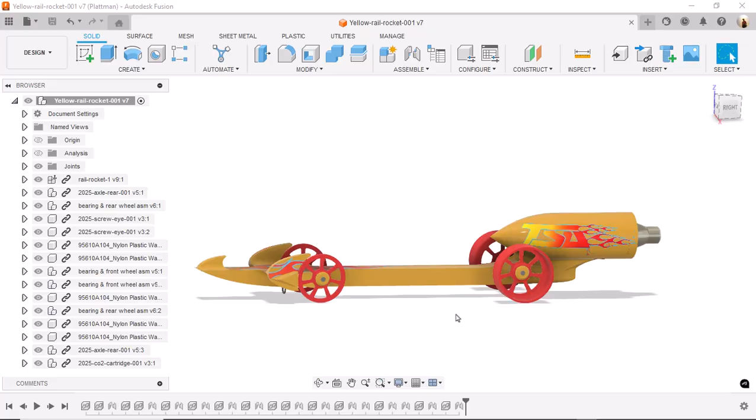Okay, this is the final completed dragster that we're ultimately going to build, to design and build. But what I want to focus on now is what we need to build next, and that is these wheel hubs.

Here you see the part in the front of the vehicle, and then here you see it in the rear. What we do with these is we design them so that they are flush mounted. You put a drop of epoxy or CA glue on the end of the axle and on this hub. The axles are fixed, meaning they do not spin, but the wheel itself spins. With that drop of CA glue or epoxy on this end, it should securely keep the wheel onto the axle and thus onto the car.

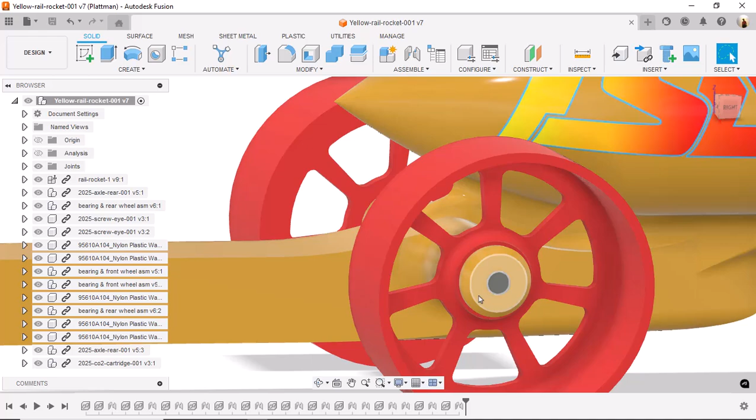So let's get started with that now. I'm going to create a new file, and I'll be referencing the one I've already drawn, using those measurements from there.

So here we are in a new file. Let's go ahead and save this file, and we will call this 2025 axle wheel hub. I'll make sure it's saved in my dragster parts folder, and I'll highlight this because we're going to use that later, and hit save.

As soon as it saves, we right mouse click here and say new component. Highlight that again, Control V from what we had copied before, and hit save.

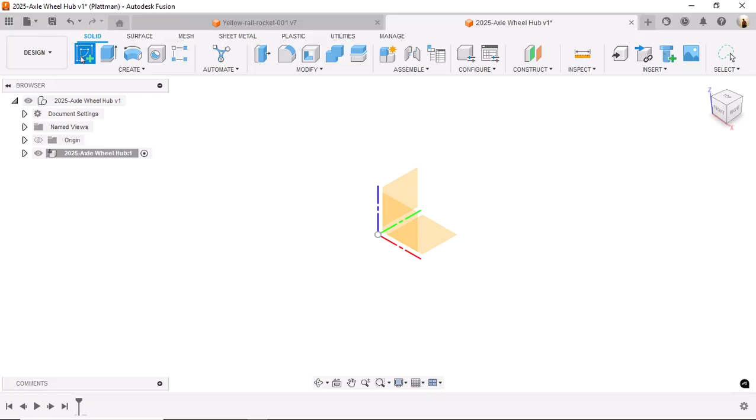Now let's start drawing and designing on the right plane, because that's the plane in which the wheels are mounted. I'll draw a circle and make that circle 3.15. The axle itself is 3 millimeters, but we want to go a little bit over just so there's clearance based on how the part is printed. So we'll go ahead and save that.

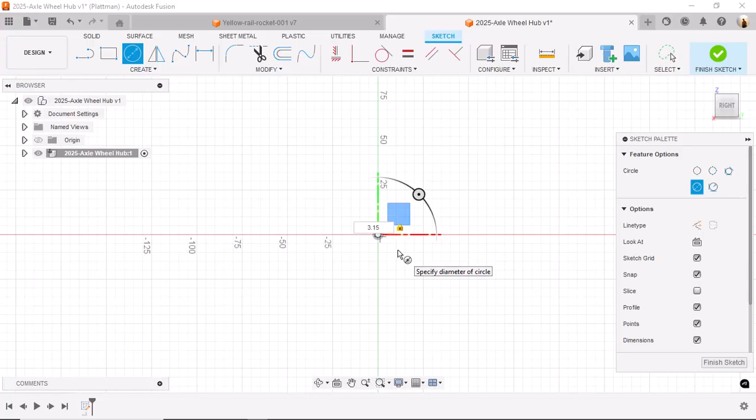And then I'm going to zoom up on this further and create another concentric circle here—whoops, that's not concentric. Let's do that again. We'll create a circle. Now I'll introduce something new: just grab this and come out. Now you see they're not concentric, but we want them to be.

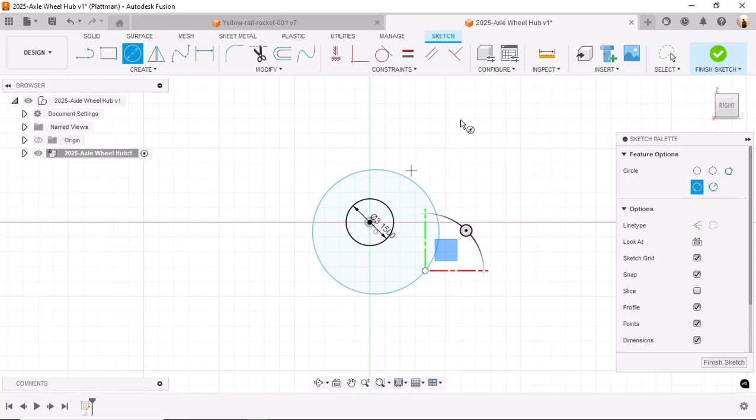So what we'll do is create a constraint, which is kind of like a rule in how the geometry is governed. I'll hit concentric, start with this first circle, and then get that second one. Now the circles are concentric.

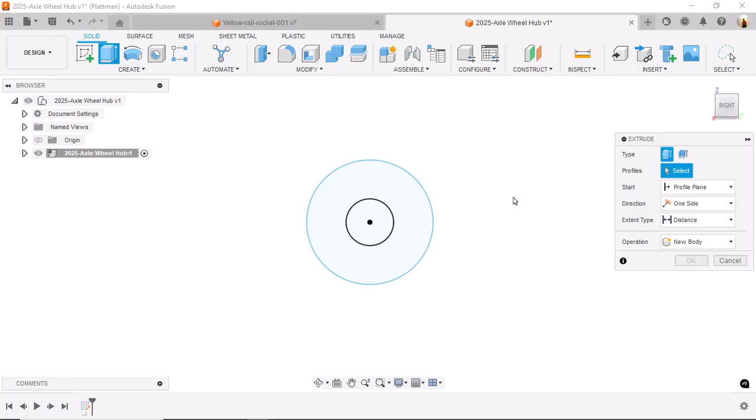Next I want to hit extrude, so I'm going to extrude this geometry 2 millimeters. Let's look at that in 3D space—so we see it's going to be extruded 2 millimeters. We'll go ahead and hit OK.

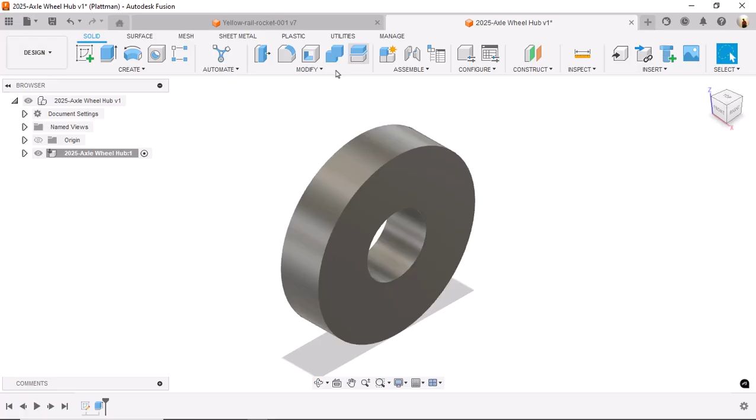Now I want to create a chamfer, which is an angled edge that goes around this, and I'm going to set that chamfer at 1. I'll select the chamfer command, select on this, and say 1. That'll automatically default and come in as equidistant at 45 degrees. We'll go ahead and hit OK.

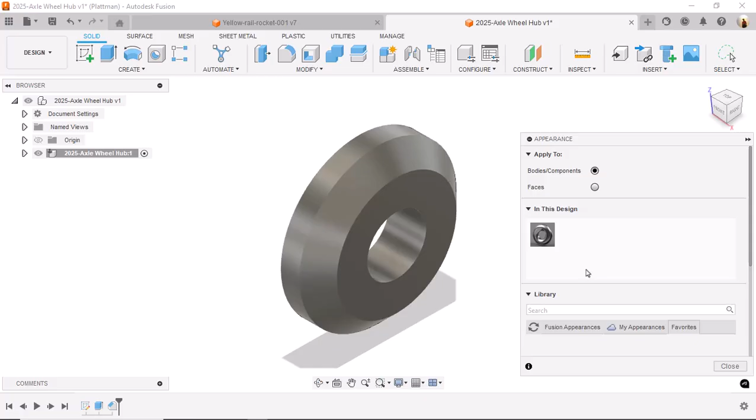And I want to create a color on this one, yellow. So I'll hit my A key for appearances, come down here to my favorites, grab the yellow, drag it up here, and put it on the wheel.

Okay, let's go back and look at the original dragster and see how close it looks. Yeah, it looks pretty close, if you can see that right there. So we'll go back up here and I'll change the way it's viewed to visual style of shaded with visible edges.

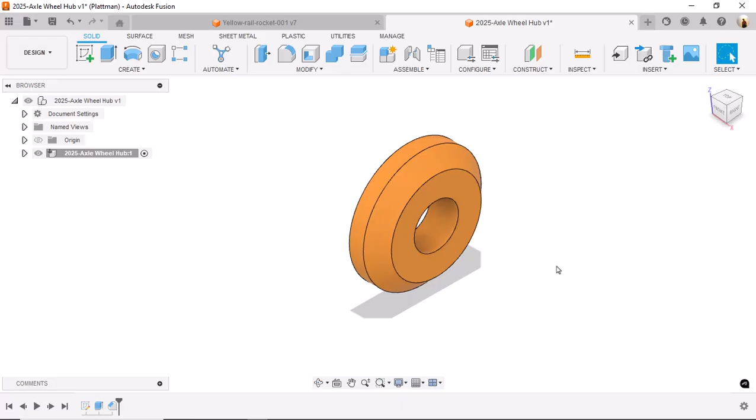Okay, that looks great. So we're going to go ahead and save this file and hit OK, and we'll come back to this in a moment.